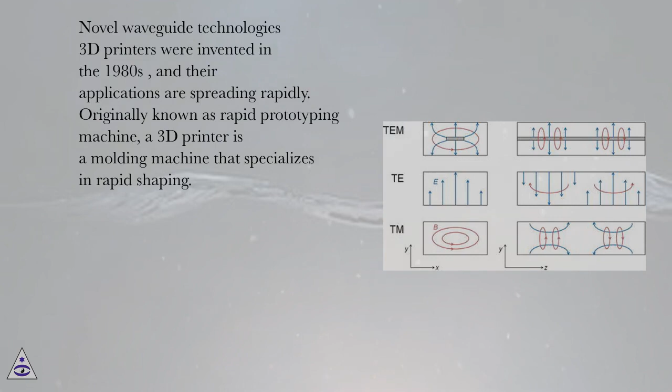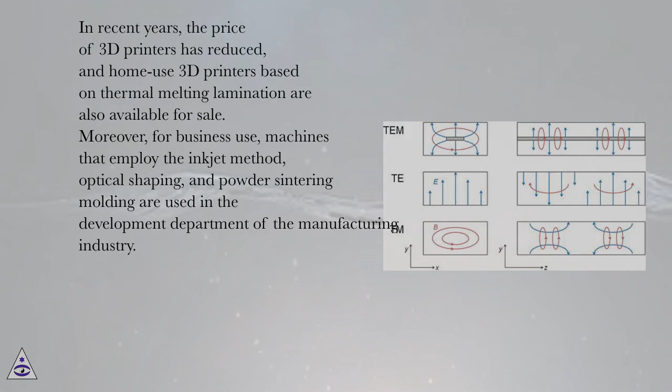In recent years, the price of 3D printers has reduced, and home-use 3D printers based on thermal melting lamination are also available for sale. Moreover, for business use, machines that employ the inkjet method, optical shaping, and powder sintering molding are used in the development department of the manufacturing industry. Because 3D prototypes can be made without a mold, they can be made using simple prototyping.

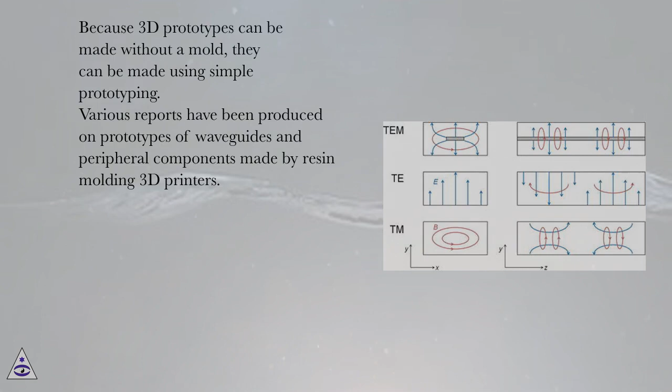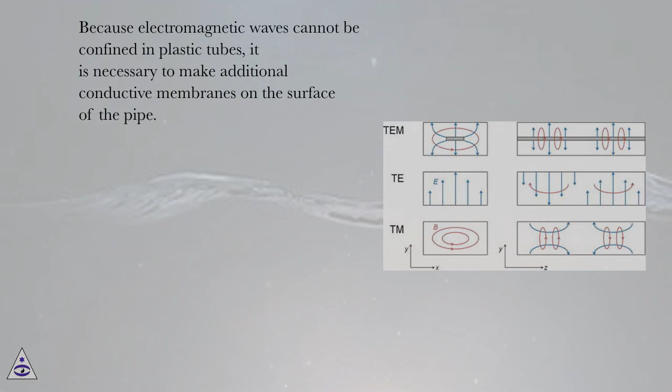Various reports have been produced on prototypes of waveguides and peripheral components made by resin molding 3D printers. Because electromagnetic waves cannot be confined in plastic tubes, it is necessary to make additional conductive membranes on the surface of the pipe. Thus, although a film having high conductivity can be formed by the plating method, the film thickness is approximately 1 μm, and so the microwave penetrates into the inside of the film before finally being transmitted. Thus, adequate shielding properties cannot be obtained.

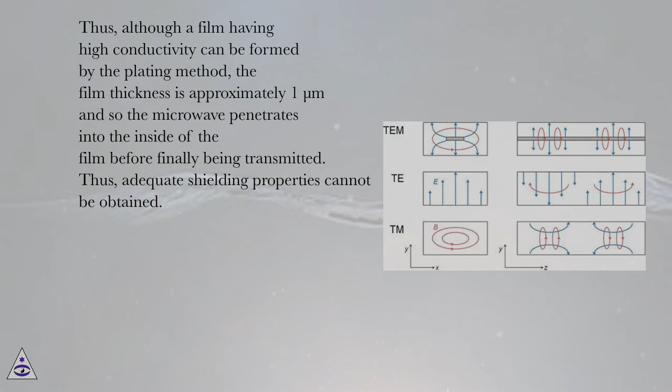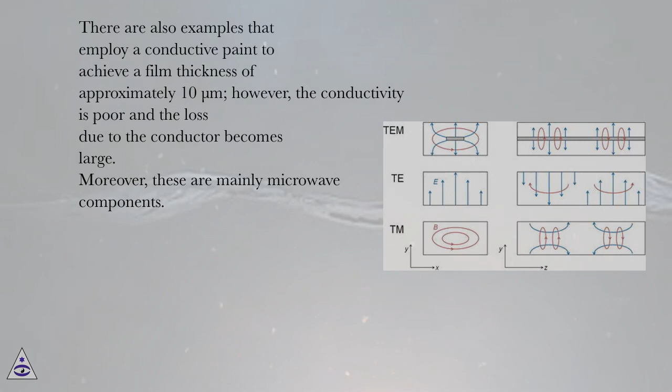There are also examples that employ a conductive paint to achieve a film thickness of approximately 10 μm, however, the conductivity is poor and the loss due to the conductor becomes large. Moreover, these are mainly microwave components. For millimeter wave components, fine processing is required, which is difficult to realize with the current processing precision.

Moreover, evaluation of several resin materials of the acrylonitrile butadiene styrene such as the resin used in the optical fabrication method revealed that the value of the imaginary part of the dielectric constant, which is a factor of the loss of electromagnetic waves, is relatively large. In the future, it is desirable to develop low-loss materials and molding methods for microwave components.

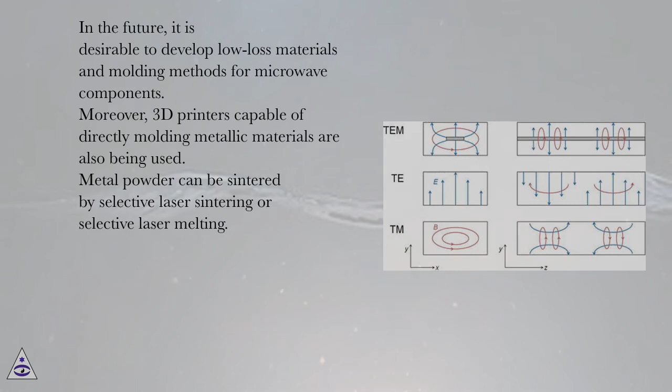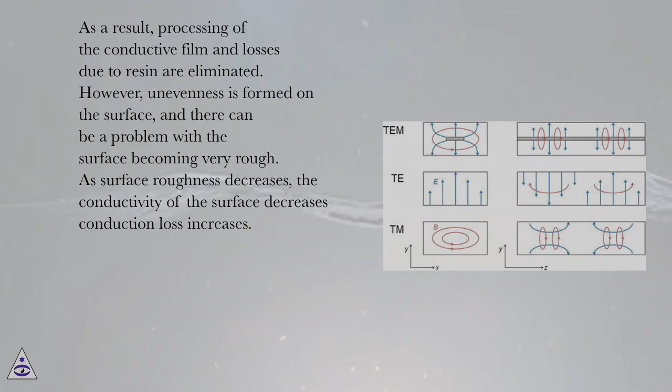Moreover, 3D printers capable of directly molding metallic materials are also being used. Metal powder can be sintered by selective laser sintering or selective laser melting. As a result, processing of the conductive film and losses due to resin are eliminated. However, unevenness is formed on the surface, and there can be a problem with the surface becoming very rough. As surface roughness increases, the conductivity of the surface decreases, conduction loss increases.

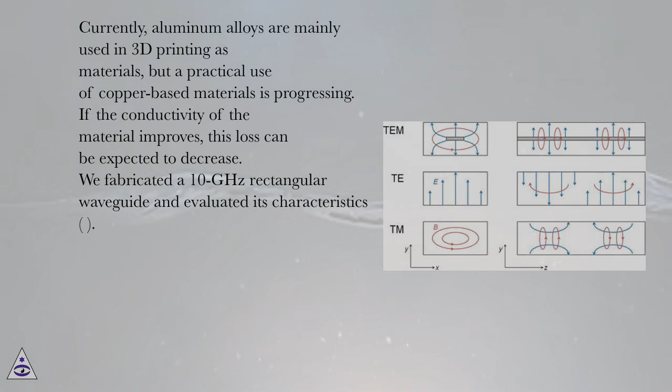Currently, aluminum alloys are mainly used in 3D printing as materials, but a practical use of copper-based materials is progressing. If the conductivity of the material improves, this loss can be expected to decrease. We fabricated a 10 GHz rectangular waveguide and evaluated its characteristics. As a result, there was a transmission loss of approximately 1.5 times than that of the usual waveguide. There was also a leak from the flange portion. The connection was improved by polishing unevenness, but additional work is still required.

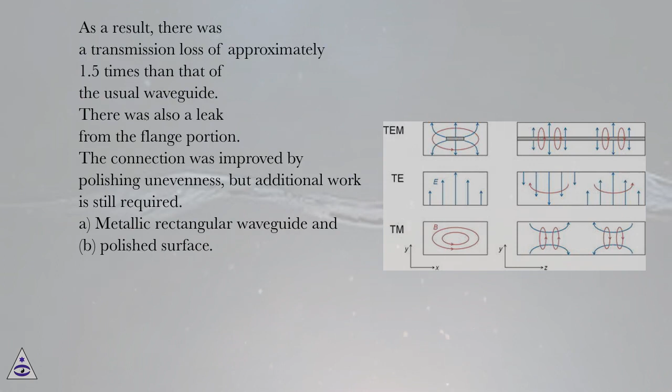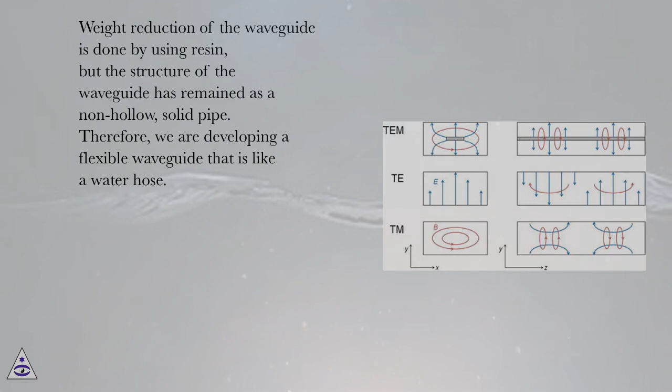A. Metallic rectangular waveguide and B. Polished surface. Weight reduction of the waveguide is done by using resin, but the structure of the waveguide has remained as a non-hollow, solid pipe. Therefore, we are developing a flexible waveguide that is like a water hose. Besides improving convenience by making the pipe flexible like a hose, the image changes and the application range may expand.

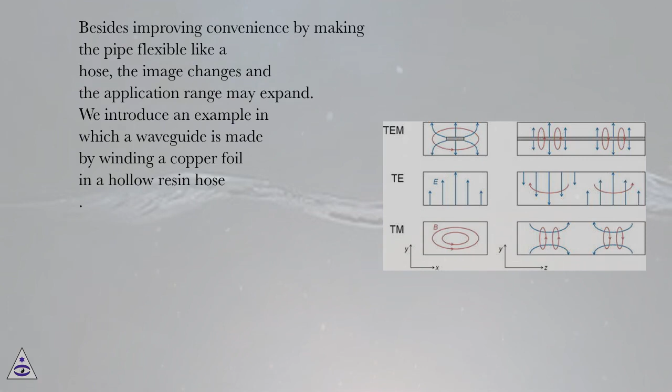We introduce an example in which a waveguide is made by winding a copper foil in a hollow resin hose. Our waveguide is a hollow, soft resin hose with a conductive coating on the outside for electromagnetic wave transfer. Conventional metal waveguides undergo passage, return, and conductive losses, which should be reduced as far as possible. Resin waveguides generate additional dielectric and radiation losses.

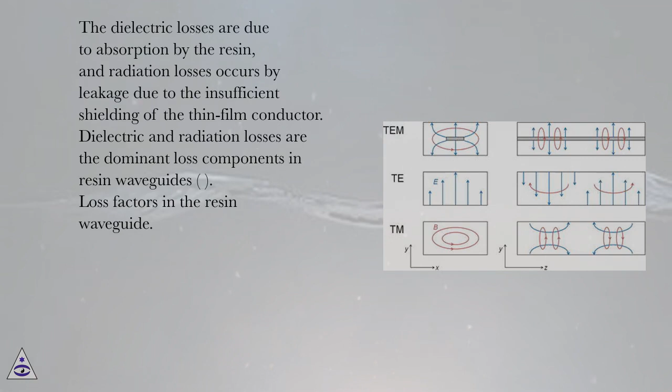The dielectric losses are due to absorption by the resin, and radiation losses occur by leakage due to the insufficient shielding of the thin film conductor. Dielectric and radiation losses are the dominant loss components in resin waveguides. Loss factors in the resin waveguide. In this study, we use a soft elastomer material with excellent properties for forming flexible waveguides.

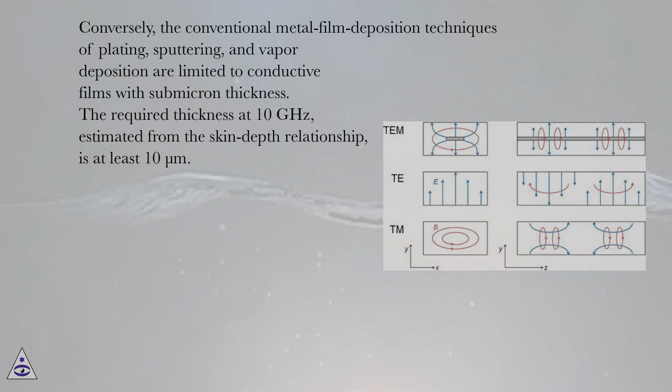In the 10 GHz band, the relative permittivity and dielectric loss tangent of the resin, εr = 2.28 and tan δ = 0.00072, respectively, ensure very low losses as in a Teflon. Conversely, the conventional metal film deposition techniques of plating, sputtering, and vapor deposition are limited to conductive films with submicron thickness. The required thickness at 10 GHz, estimated from the skin depth relationship, is at least 10 µm. Therefore, the film in our prototype was formed by winding an 18 µm thick copper foil around the aforementioned resin hose.

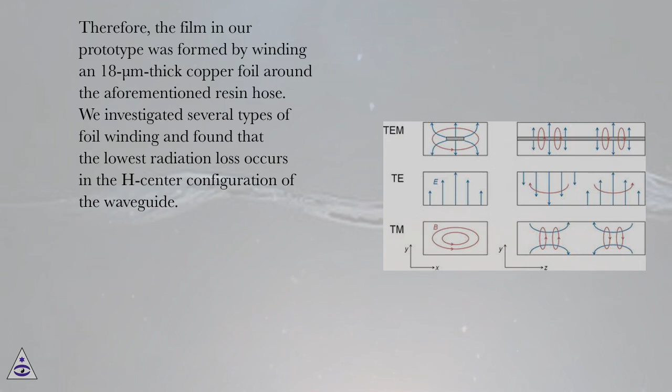We investigated several types of foil winding and found that the lowest radiation loss occurs in the H-center configuration of the waveguide. The prototype weighs 67 grams/m and costs $1.30 per meter, enabling a lightweight and inexpensive waveguide. The waveguide has a low loss and low emission, with a transmission characteristic of -0.39 decibels/m in the 10 GHz

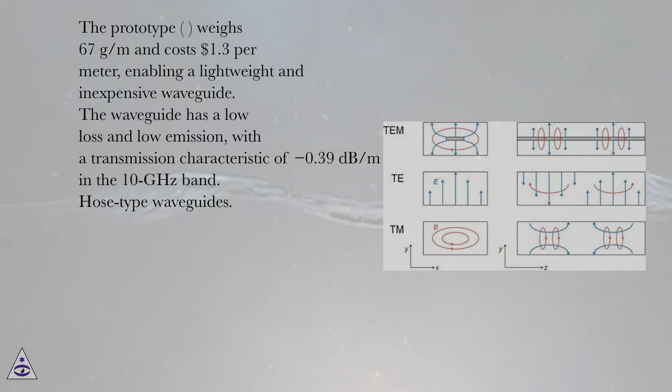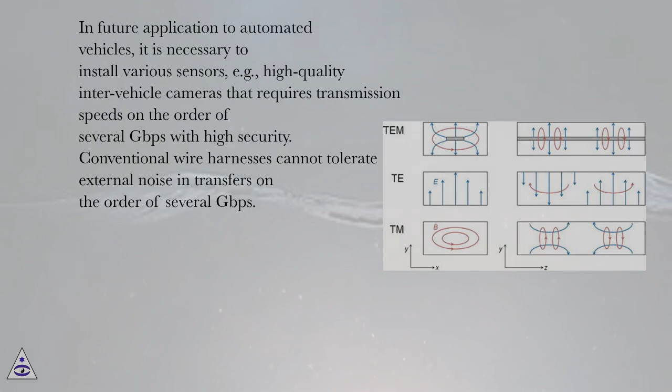band. Hose-type waveguides. In future application to automated vehicles, it is necessary to install various sensors, for example, high-quality inter-vehicle cameras that require transmission speeds on the order of several Gbps with high security. Conventional wire harnesses cannot tolerate external noise in transfers on the order of several Gbps. Because the influence of noise increases with transmission speed, we believe that it is necessary to review the transmission line

design. As shown, the proposed waveguide is laid from the front to the back to transmit a camera image. The camera image was transmitted inside the waveguide by using high-speed communication between sensors. Inter-vehicle communication system. Research on two-dimensional communication by using electromagnetic waves that propagate in a thin sheet is progressing. It is assumed that the communication distance is up to several meters.

Moreover, by placing a type of antenna known as a coupler at an arbitrary point in the sheet form, close proximity communication inside and outside the sheet can be made possible. It uses evanescent waves that ooze out of the sheet. The evanescent wave is an electromagnetic wave propagating only near the surface of the sheet.

In this way, the sheet-shaped waveguide does not require wiring for each sensor terminal and does not radiate electromagnetic waves to space. In addition to contributing to improving communication security, a relatively large power can be transmitted without exposing people or objects that are not close to the sheet to a strong electromagnetic field.

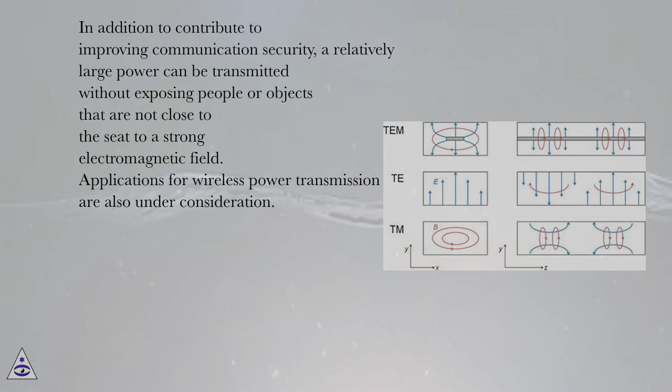Applications for wireless power transmission are also under consideration. Moreover, in the case of Japan, standard specifications for wireless power transfer in the sheet are also in place. For future applications, a power supply for a car while in motion and wearable sensor devices are being considered.

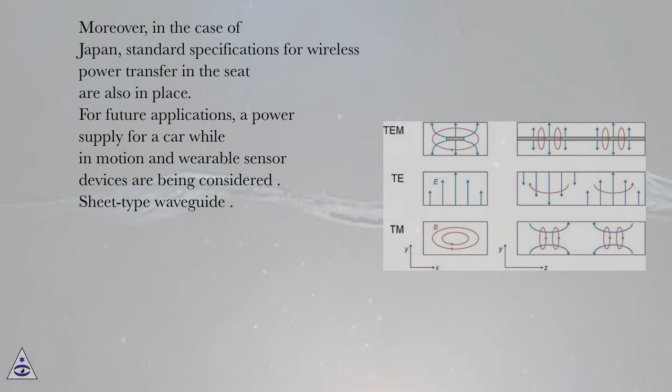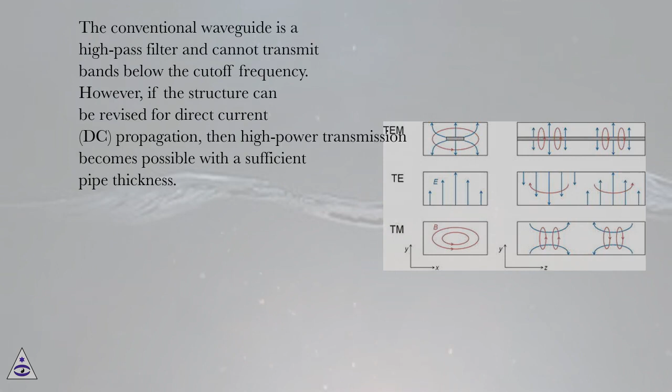Sheet-type waveguide. The conventional waveguide is a high-pass filter and cannot transmit bands below the cutoff frequency. However, if the structure can be revised for direct current, DC, propagation, then high-power transmission becomes possible with a sufficient pipe thickness. We also consider that if a stop band sufficiently far from the pass band can be transmitted, then we can achieve low-frequency communication and sharing in addition to broadband communication.

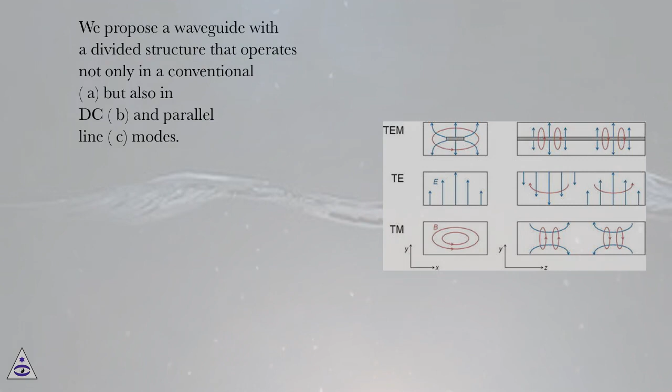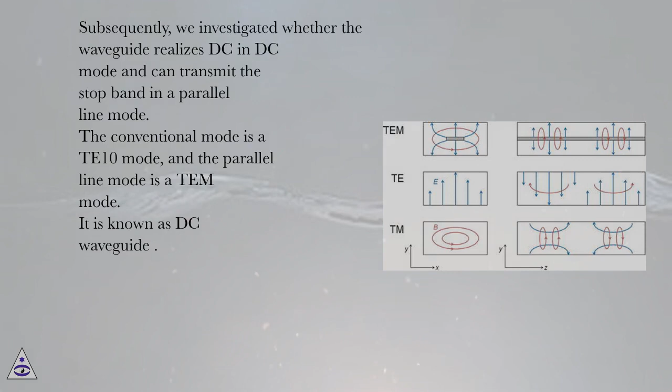We propose a waveguide with a divided structure that operates not only in a conventional, A, but also in DC, B, and parallel line, C, modes. Subsequently, we investigated whether the waveguide realizes DC in DC mode and can transmit the stop band in a parallel line mode. The conventional mode is a TE10 mode, and the parallel line mode is a TEM mode. It is known as DC waveguide. Propagation modes of the split waveguide.

Although the result differs from simulation results, transmission in the stop band was, at least to some extent, experimentally confirmed. In DC mode, the resistance was approximately 0 ohms, confirming that high-efficiency DC transmission is also possible. Measured results of DC waveguide. In future work, we will assess the performance of the waveguide in industrial applications. Such plural transmission modes are desired for high-power transmission and broadband communications in automatic driving.

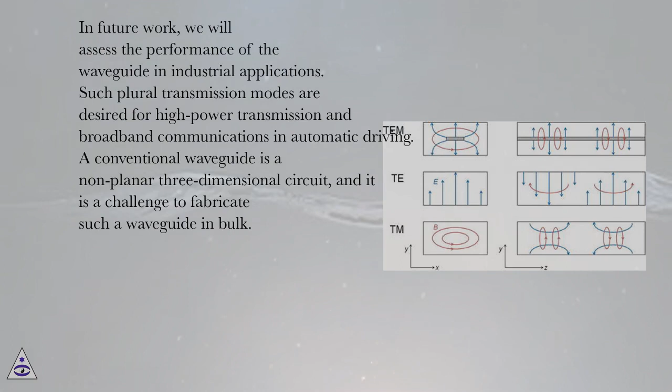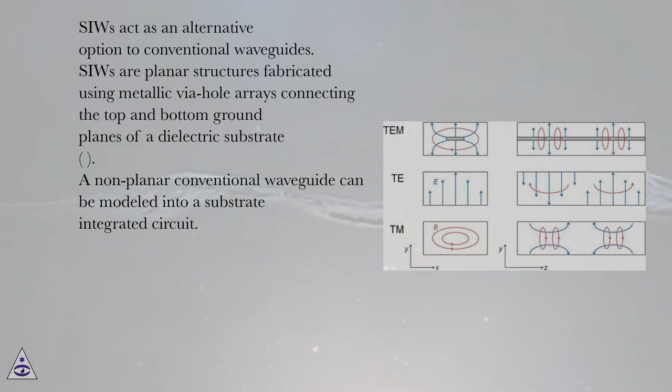A conventional waveguide is a non-planar three-dimensional circuit, and it is a challenge to fabricate such a waveguide in bulk. SIWs act as an alternative option to conventional waveguides. SIWs are planar structures fabricated using metallic via hole arrays connecting the top and bottom ground planes of a dielectric substrate. A non-planar conventional waveguide can be modeled into a substrate integrated circuit. They are compact, lightweight, cost-effective, and easy to fabricate.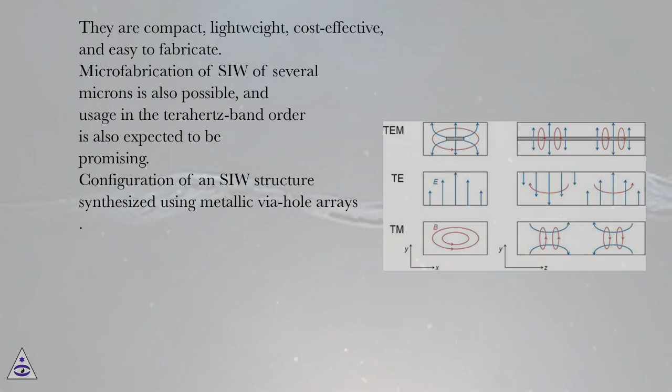Microfabrication of SIW of several microns is also possible, and usage in the terahertz band order is also expected to be promising. Configuration of SIW structure synthesized using metallic via hole arrays. An example in which a resonance structure is provided in a tube like a conventional waveguide to form a band pass filter has also been reported.

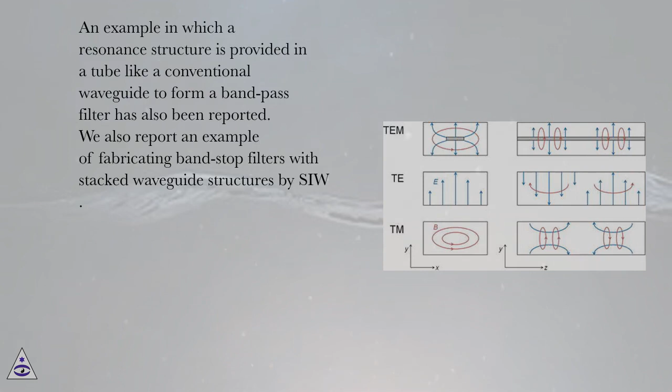We also report an example of fabricating band stop filters with stacked waveguide structures by SIW. When the microwave is input to the SIW filter, reflection occurs due to a mismatch of the characteristic impedance at the input portion.